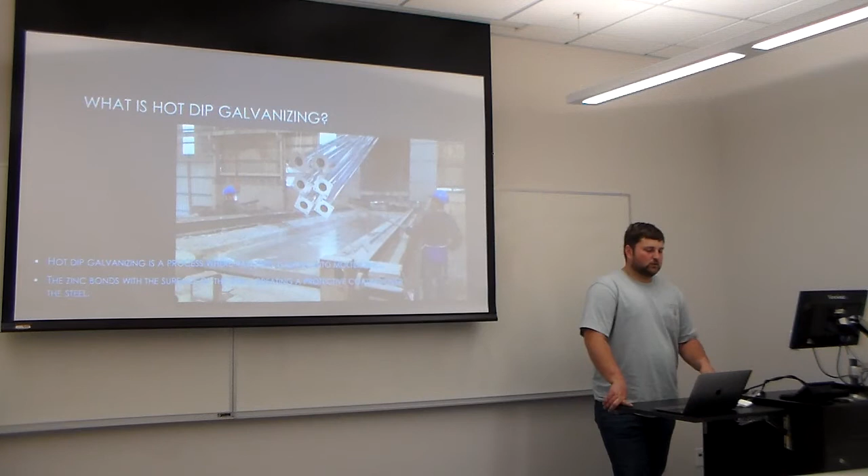But when you see it, you really think of it as more of a coating, like covering something in full. But in reality, the zinc actually bonds with the steel itself, and it's not so much a coating as it turns into part of the structure that you're going to be galvanizing. So a little bit more about galvanizing.

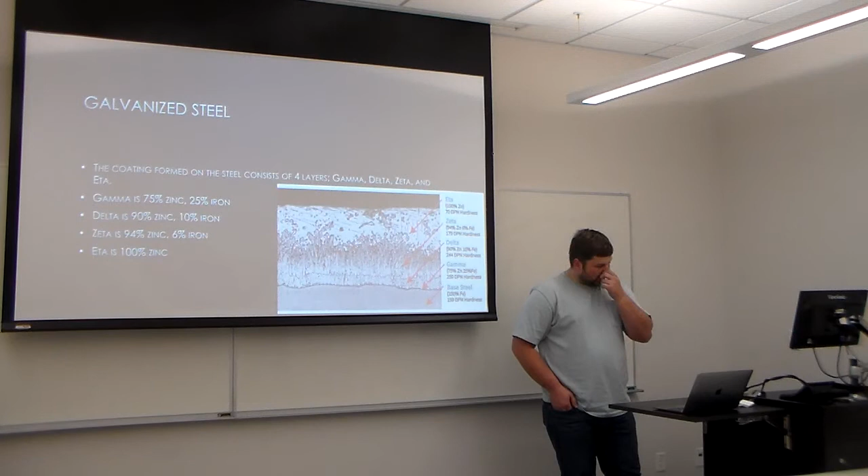The coating has 4 different layers: gamma, delta, zeta, and eta. There's base steel, which is iron. Then above that, you have your gamma layer, which is going to be 75% zinc and 25% iron. Then above that, you have delta, which is 90% zinc, 10% iron. Zeta is 94% zinc, 6% iron, and then the last layer, which is eta up here, is going to be

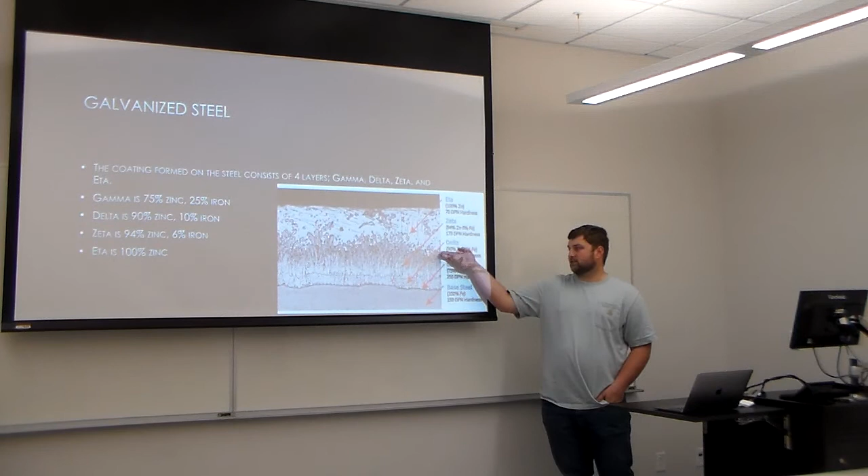100% zinc. And that also factors into the longevity of it, because if you stop at delta through your process, the iron in that layer is going to rust. So you have to make sure that you leave your steel in the zinc bath long enough to get all the way out to your eta layer.

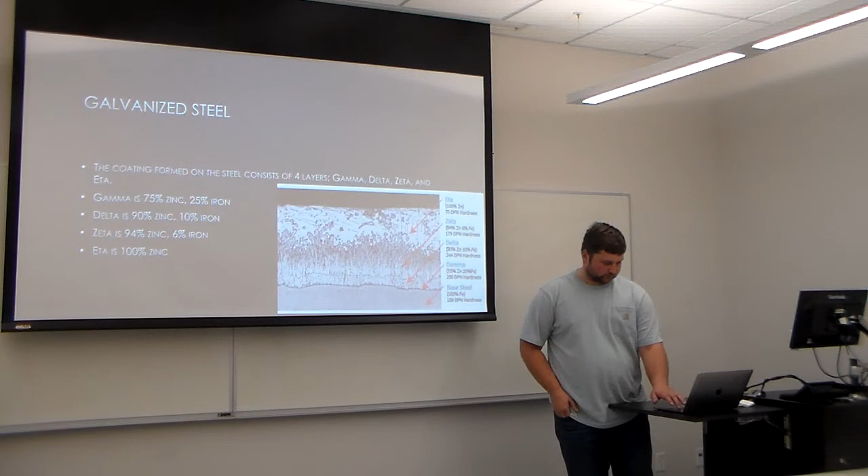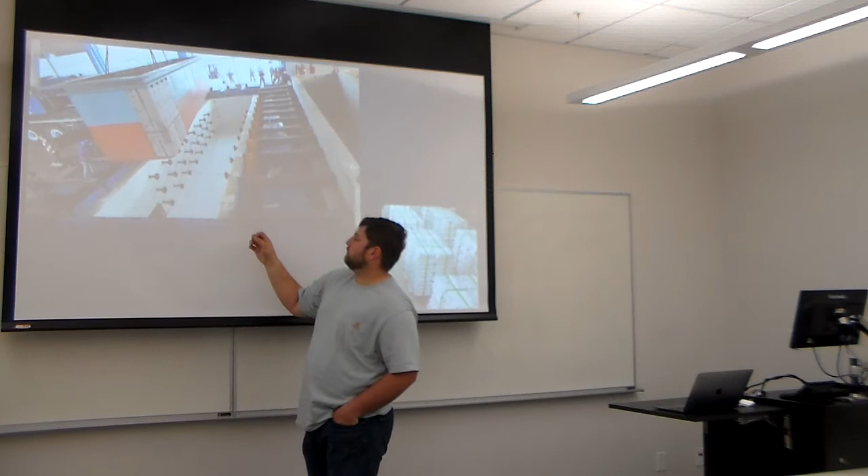You have a thermocouple that goes into the kettle that senses the temperature of the zinc. At this point they're usually all PID controlled, and that turns the burners on and off as needed. It's all sealed in, so the gas burners heat up the area that surrounds the kettle, and that's what brings the zinc up to temperature.

Typically, if your steel, say, is 100,000 pounds in a day, which would be low, you want to have about 3% adherence. So you'd only be around 3,000 pounds, but at $1.50 a pound for zinc, you really want to be conservative with that. So the steel has to be pure in order to be galvanized.

So it has to go through a pretreatment process, which depending on where you are, is going to vary: you use hydrochloric acid or sulfuric. Sulfuric is going to have to be heated, but they're two different methods that eat the rust off of the steel. That way you get a clean surface.

You also have to run it through what's called a degreaser. It could be a weak acid or a caustic soda. That's going to eat any oil or grease off of the steel, so that the zinc will actually stick. You also have some scale and stuff like that from the rollers that make your beams and such. But once you get all that off, I'll talk a little more about this later.

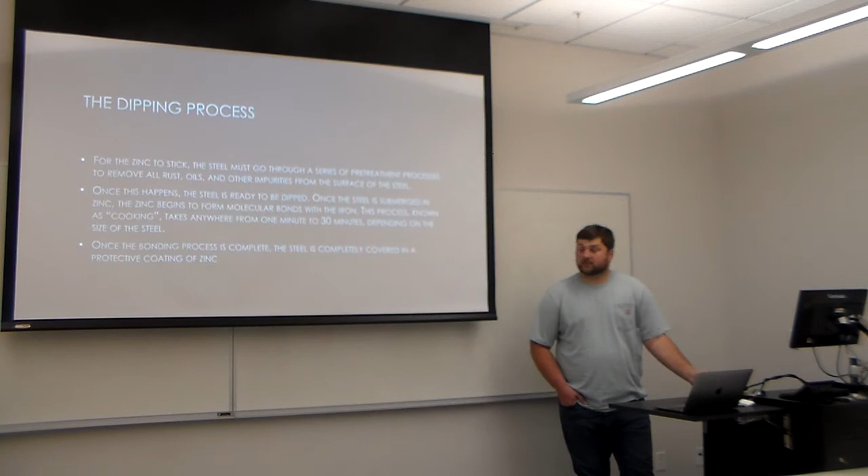So once the steel is ready to be galvanized, the product is lowered into the zinc bath, and from there the zinc starts to bond with the steel. Once it stops bubbling, that's when it's ready. Depending on the weight and the size of the product, that can take anywhere from 1 minute to 30 minutes for some of your heavier beams. And once that process is complete, you have a weather-resistant galvanized coating on the outside of

the surface. So related to heat transfer, there's several obviously with the furnace itself, but focusing on the dip of the product itself: the zinc is kept at 850 degrees, which sounds really hot, and it is. When you think about it, it's four times as hot as boiling water. So that's for perspective.

Once the steel goes into the zinc, there's something known as flux that burns off and creates ash that floats to the top. You have to remove that. But really, once it gets down into the zinc, that steel sucks up all of that heat and the zinc starts to bond.

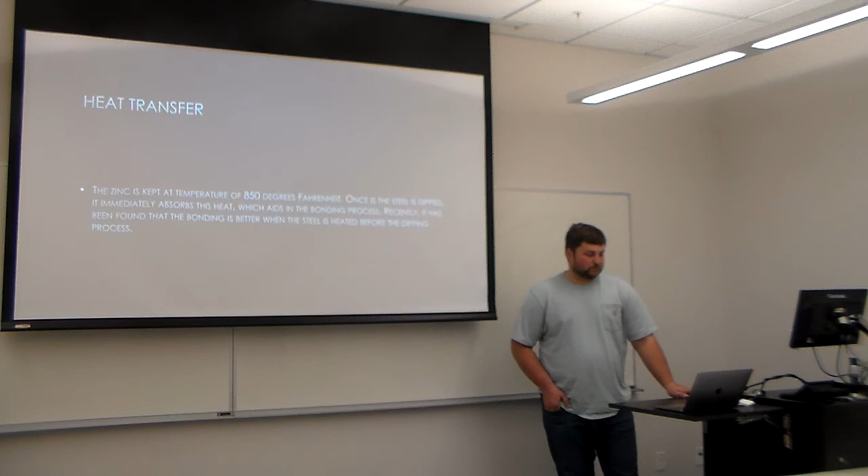But something that we've found recently is that the hotter the steel is when it goes in, the better the zinc will actually stick. So it does you much better to heat your steel up. That way your heat transfer rate can be lower. Even though your heat transfer is going to be slower, it actually speeds up the process at which you can get your coating on there. So that's pretty much the basics of hot dip galvanizing.